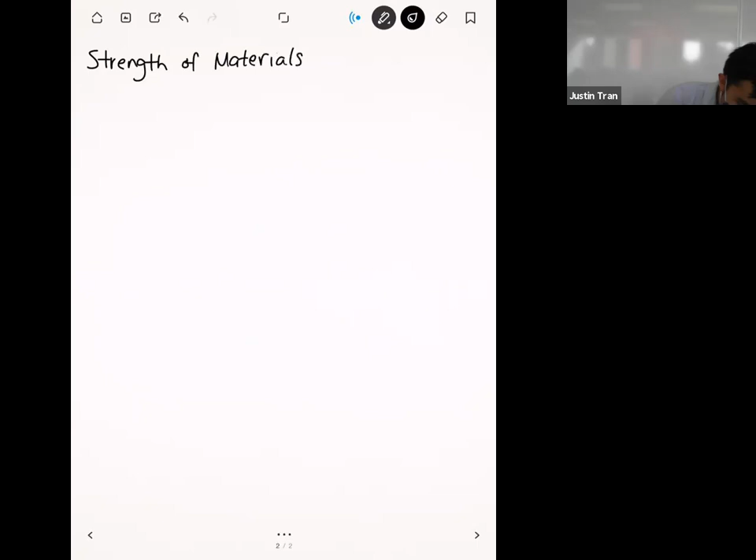Let's go ahead and finish up our review of strength of materials. Last time I think we left off talking about the concept of stress. There are really two main concepts I want you guys to take away from this review: stress and strain. Stress, as we talked about before, is basically the internal forces that develop within a structure, and these internal forces develop whenever a structure is exposed to any kind of external loads. Their primary purpose is to make sure that the structure maintains equilibrium at all parts of the structure.

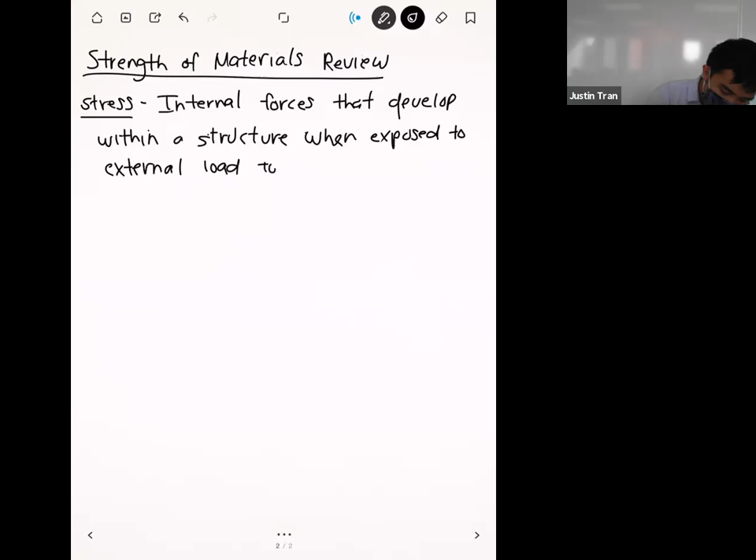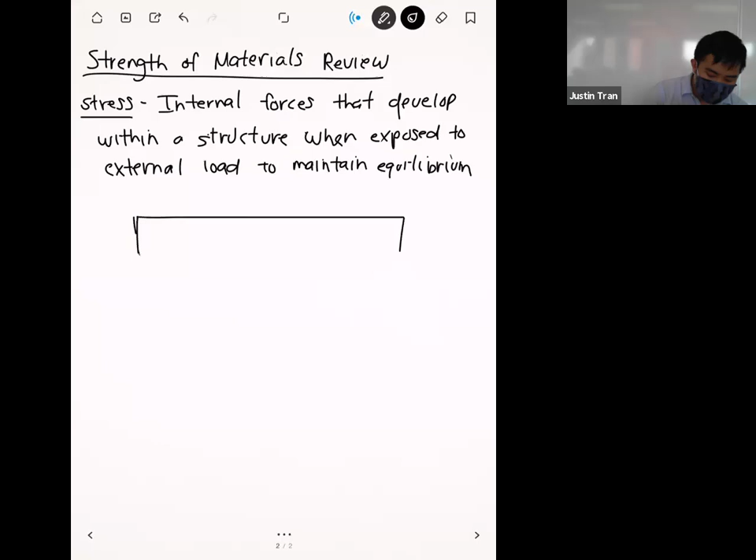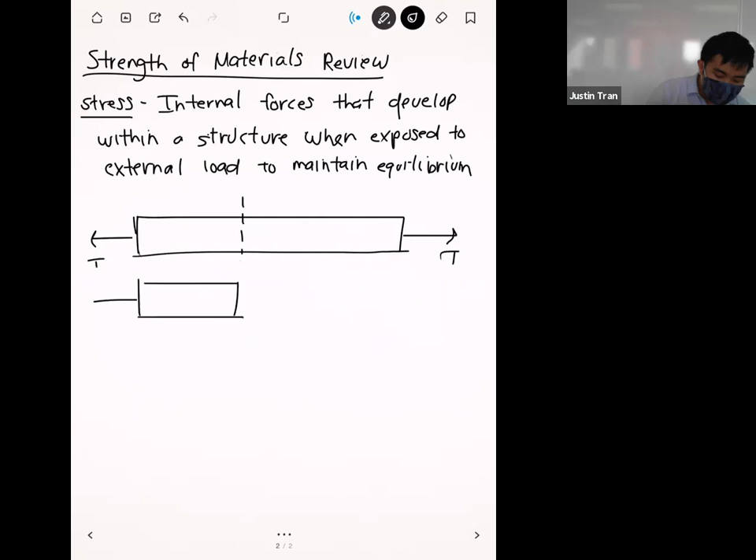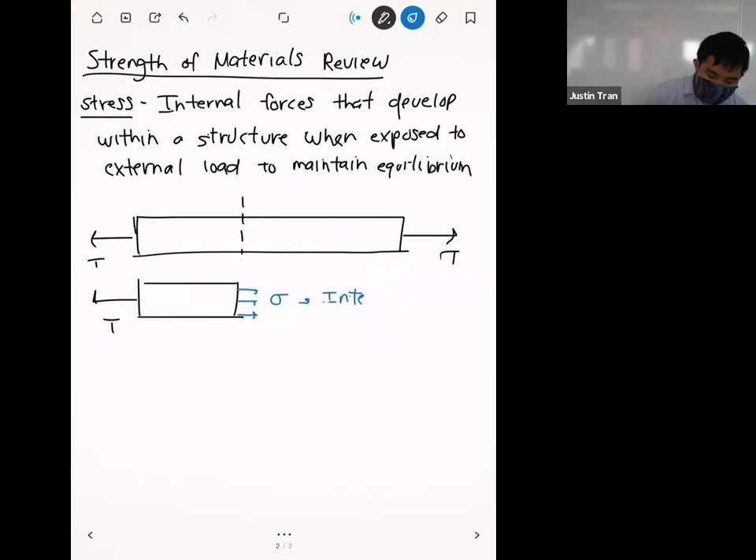The simple example we did last time was a rod. If we pull on this rod in tension on both sides, applying the same load T in opposite directions, we know this rod as a whole is in static equilibrium. But if you slice the rod on the interior, this section also has to be in static equilibrium. In order to maintain that, some internal stresses here have to develop.

So why do we care about this in biomechanics? Especially when we start to talk about bones—biomechanics, remember, is just an application of all these principles to biological systems. Where stress is relevant for biomechanics is that it helps us determine whether a bone, a ligament, or any kind of tissue will fail.

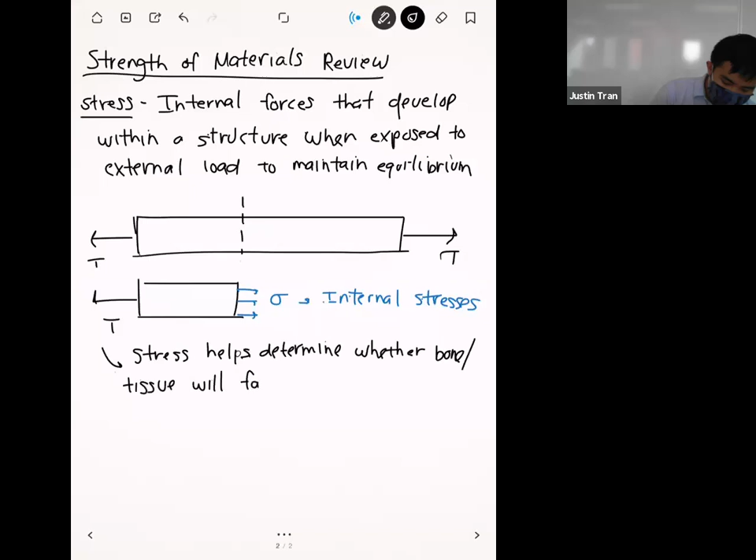Every material, and bone and tissue are no exception, has this parameter called the yield strength. The units for the yield strength are the exact same as stress. So if the internal stress within a structure ever exceeds the yield strength, then we know the structure is going to fail.

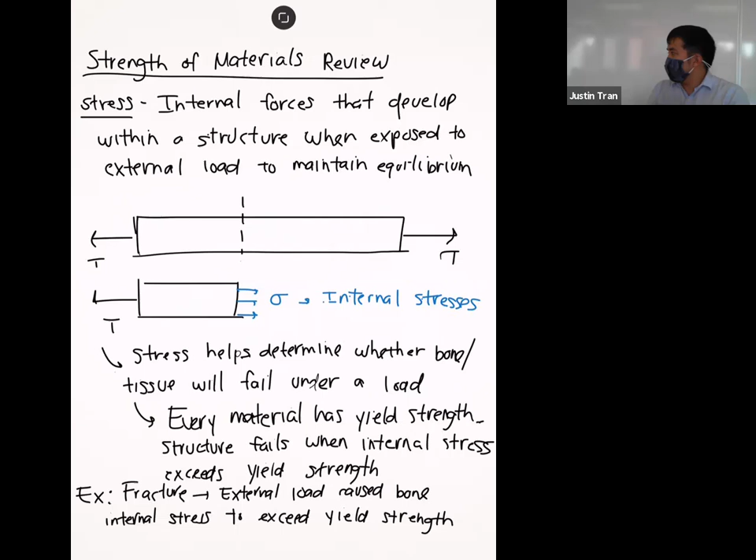As an example, or just a visual example here: when you get a broken bone or a fracture, what happened is that your body sustained some kind of large external load, and it sustained it in a way that the internal stress within the bone exceeded its yield strength. Bone is actually quite a bit more complicated than your typical engineering materials, but it still kind of behaves the same way—whenever you stress it past yielding, it's going to break.

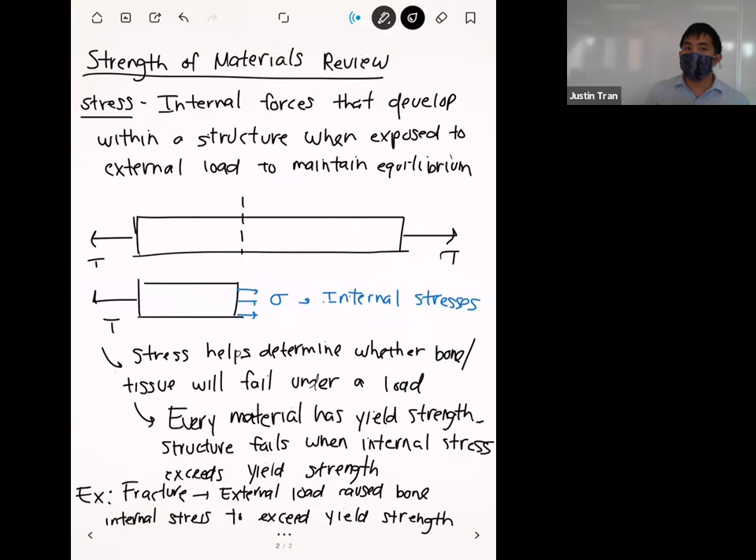Last time I know we started talking about the 6 components of the stress tensor, but I'm going to skip over that for now, because I thought a bit more about what I want you guys to take away from this. Talking about the stress tensor and all the different components gets a little too into the weeds for what we're going to do. So I want to leave our discussion of stress here, and then we'll take this and start to talk about some biological stuff. Any questions on this so far? Alright, so that's stress.

Now let's talk about strain. Strain is typically how we characterize deformations within an elastic structure.

In terms of units, strain has no units. Because the way strain is defined is that it's defined as a change in length divided by its original length. So it's basically a relative change in length.

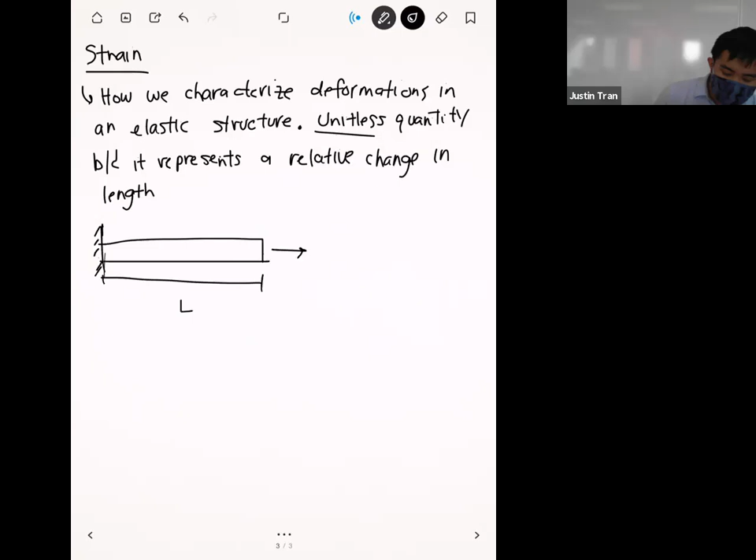I think the simplest example that we can have here is, let's say that we have some kind of rod. And so if we pull on the rod, let's say that our rod has some initial length L. And then after pulling on the rod it's going to extend. I'm making it very exaggerated here, so normally you won't see a rod extend this much unless it's made of cheese or something. So there's the original length, and that's the increase in length. And so usually we call an increase or decrease in length delta L.

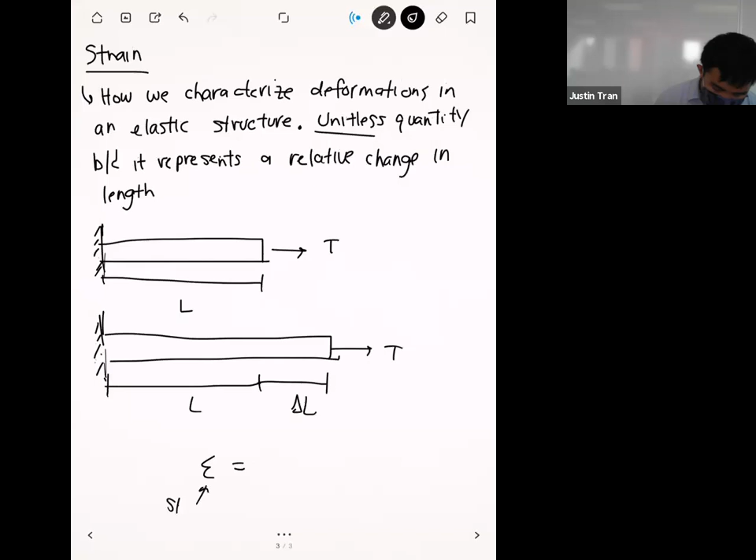And then from here, the strain, which is usually given the symbol epsilon, is given by delta L divided by L. And since we have a length divided by a length, this whole quantity here is unitless. Any questions on this? Probably you guys have seen strain before in your previous classes.

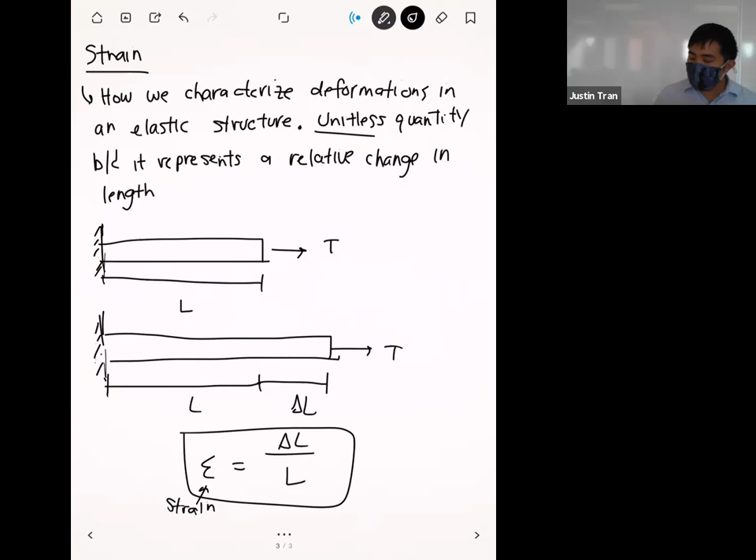All right, so that's strain. And so we have two key concepts in strength of materials here: stress and strain. It turns out that these two are very closely related. The exact nature of their relationship depends on the type of material that you're looking at.

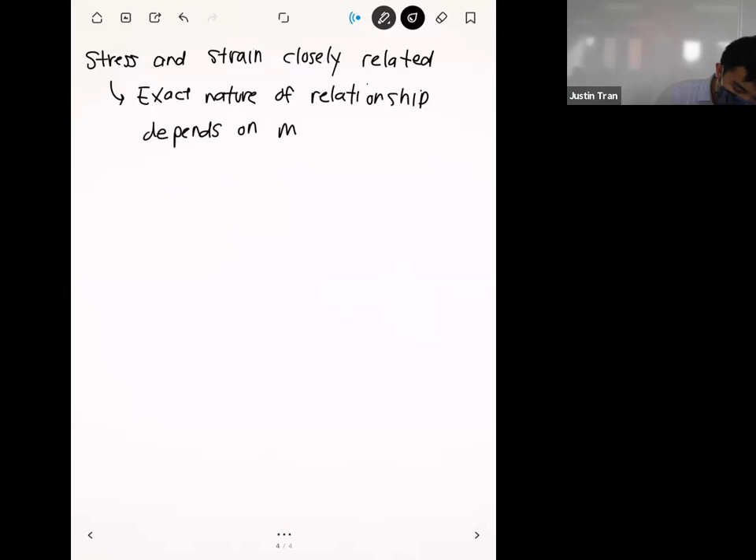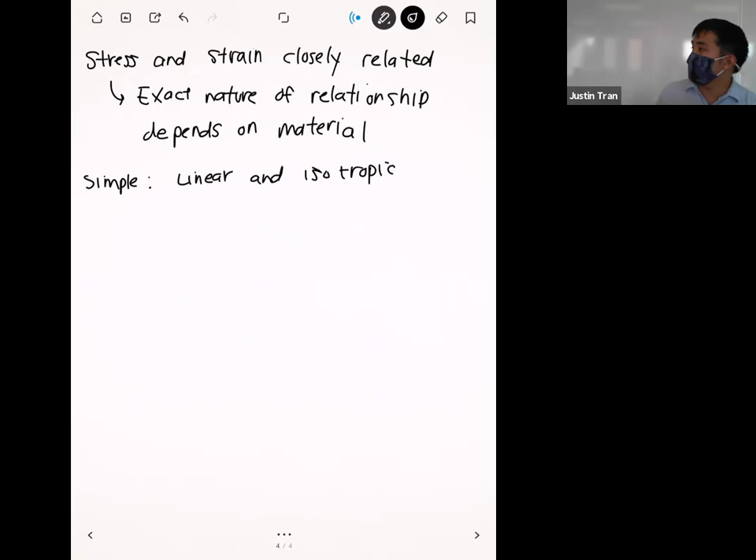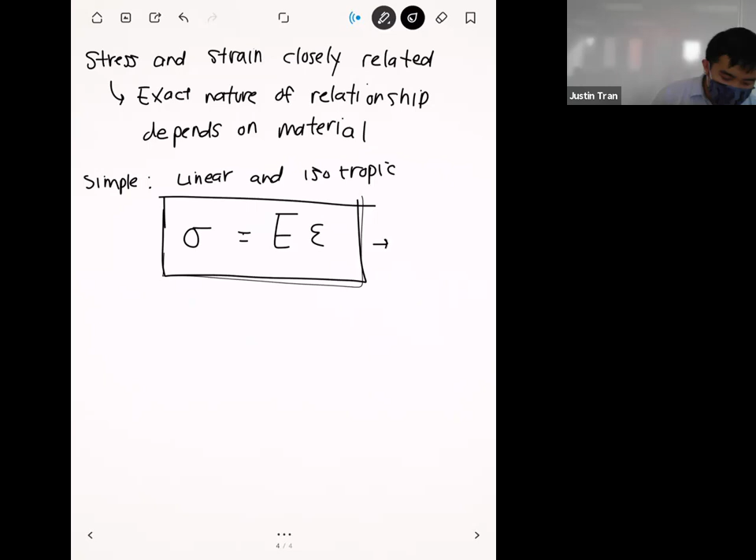But in the simplest case, we have what's called a linear material—I should say linear isotropic. In these materials, the stress and strain are linearly related. So we have stress is equal to some number multiplied by the strain. This particular relationship is known as Hooke's law, or a very simple case of Hooke's law.

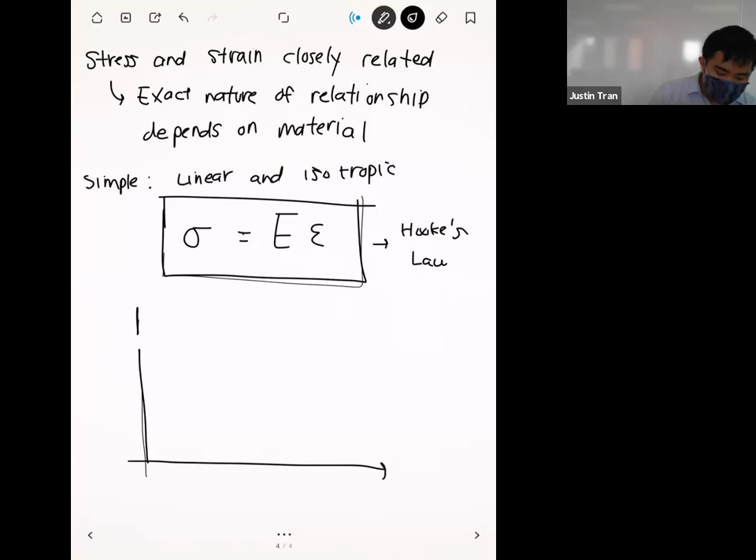And so for a linear material, we can draw up a stress-strain curve. If we have strain on the x-axis and stress on the y-axis, a linear material will just go straight up like that, where the slope of this line is E, where E here is the Young's modulus of the material.

All right, so that's stress and strain and how they're related. A linear material is usually the nicest one to work with because it's simple—once you know the strain, all you have to do is multiply it by the Young's modulus, and that will give you stress. The unfortunate thing is that we'll almost never see this relationship for any kind of biological materials, because biological materials are mostly composites of lots of different types of chemical constituents, so you'll very rarely see this kind of nice relationship.

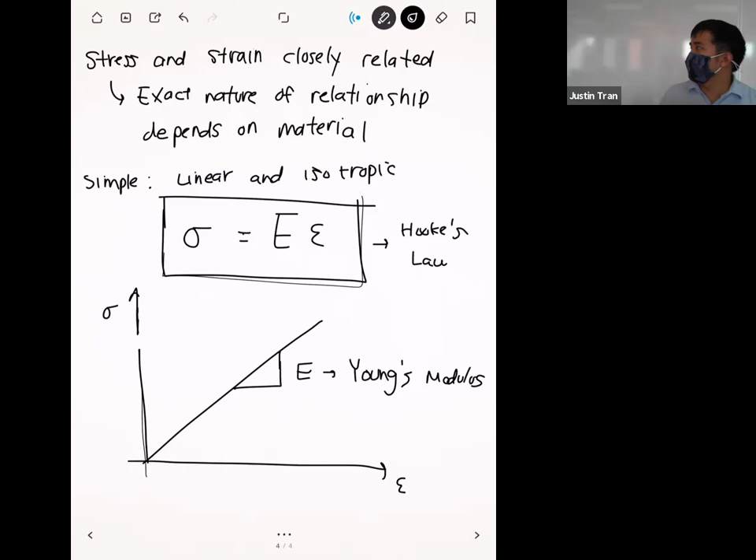Next we'll be going over bones. I'll show you probably later on today that bones actually follow a law where they're going to be either anisotropic or orthotropic. Those are kind of the two different ways stress and strain are related in bones, and we'll talk about what that looks like later on. Any questions on this before we move on to bone biomechanics?

All right, and so that's it for review. I had a lot of review planned for this class, but I realized that it's week 3 already and we're still doing review, so I should probably cut it short now. Finally, we're going to get into some kind of new exciting stuff, so let's start with bones.

And so the way I structured the next few weeks is that we're going to talk about the three main structural components within a human body. We're going to start with bones this week, and it's going to go into next week. After that, we're going to talk about muscles, and then after that, joints. We're going to talk about the general qualities of these kinds of tissues, and then after that, we're going to spend the next three or so weeks talking about specific body parts.

With the knowledge we'll have about bones, muscles, and joints, we'll see how that actually applies to your shoulder, arm, knee, or hip. Hopefully the next few weeks should be pretty exciting because it's fun new stuff. But we're going to start with the bone, because I think bones are the simplest of the tissues to look at within the body.

The first purpose they serve is that they provide a structural framework. This structural framework not only provides the support needed for the human to perform daily actions, but it also provides protection for a lot of the softer tissues in the body.

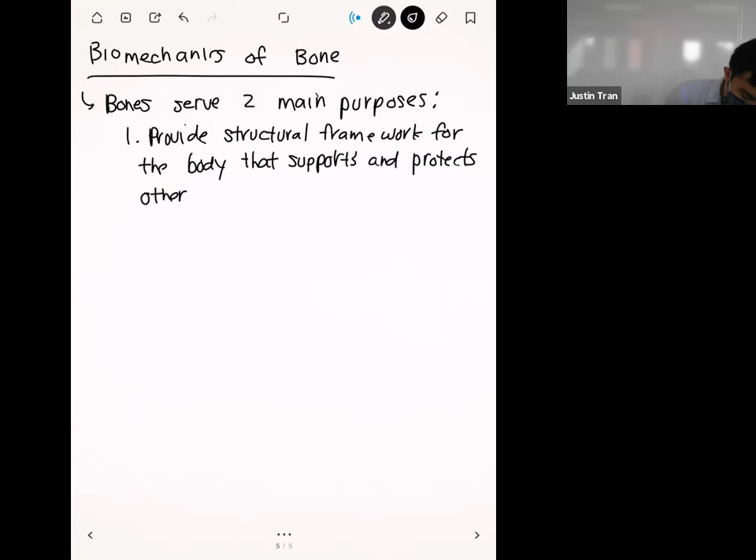So that's the first main purpose, and I think that's the one people generally think of when they think of bones. The other main purpose bones serve is that they form basically a bunch of rigid levers within your body, which is important because it provides a place for your muscles to attach to. Once your muscles attach to the bones, they can use them to move your body and do other stuff.

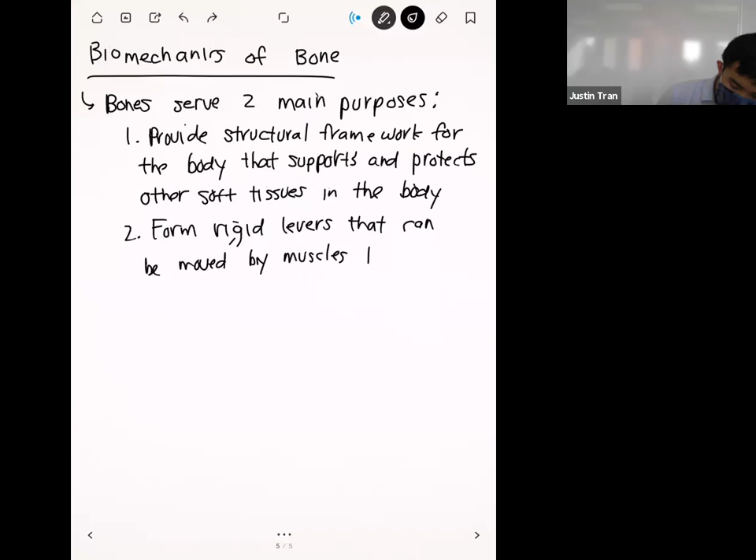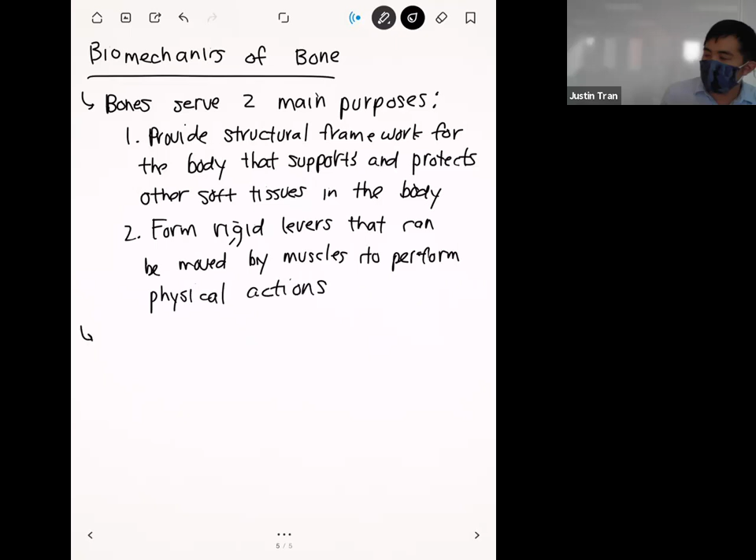So if you had to characterize what bones do for the human body, I'd say those are the two main ones. Based on this description, and based on our intuition, bones are often seen as these very hard, rigid structures within the body.

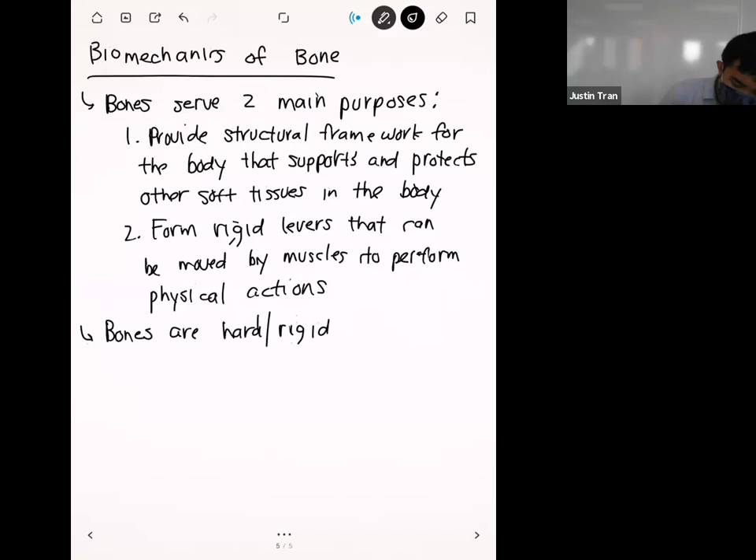They come in lots of different shapes and sizes, and each bone has its geometry morphed or designed for its specific purpose.

Just like any other system of your body, maintenance of your bone health is extremely important for every individual. This is especially important as you age.

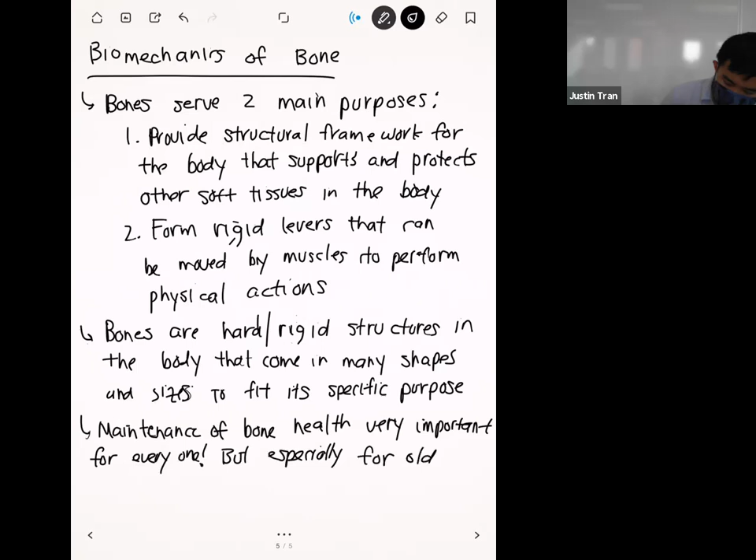As you age, the bones themselves lose a lot of their structural integrity. If you watch any daytime television, you've probably heard of the condition called osteoporosis. We'll be talking about that later, but basically it's a condition where your bones lose a lot of their calcium or mineral content and thus lose a lot of their strength, making you more susceptible to things like fractures.

If you have any injury to your bones, it's going to make movement or any kind of physical action a lot tougher—not only because of the pain, but also from a stability standpoint.

Because this is an engineering biomechanics class, we're not going to go into super great detail about all the bone structural data. My goal is to provide you with the functional information you need to design devices for bones, because there are a lot of medical devices and treatments out there that support bone health—either structural devices that offload some of the stress bones experience, or medical therapies engineers contribute to help bones heal from injury.

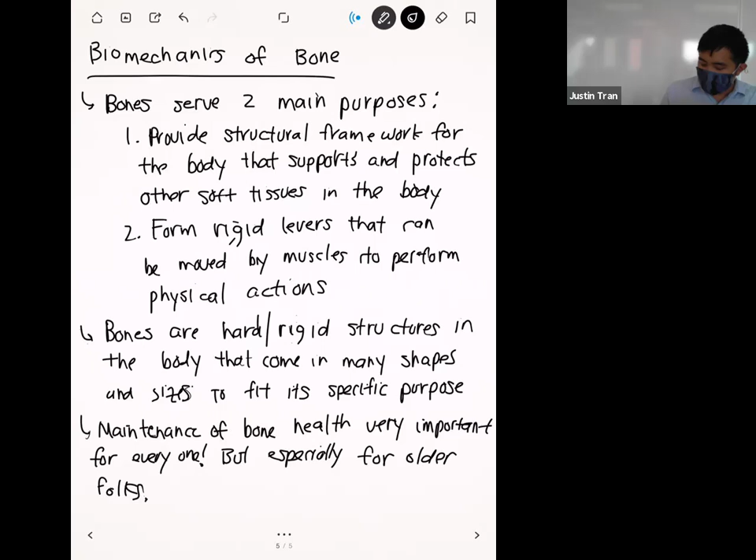Any other questions on this? Okay, all right, so let's talk about the composition and structure of bone tissue.

Before we talk about the chemical composition, let's talk again about what bones need to be in order to accomplish its goal. We know from the previous page that bones need to be strong.

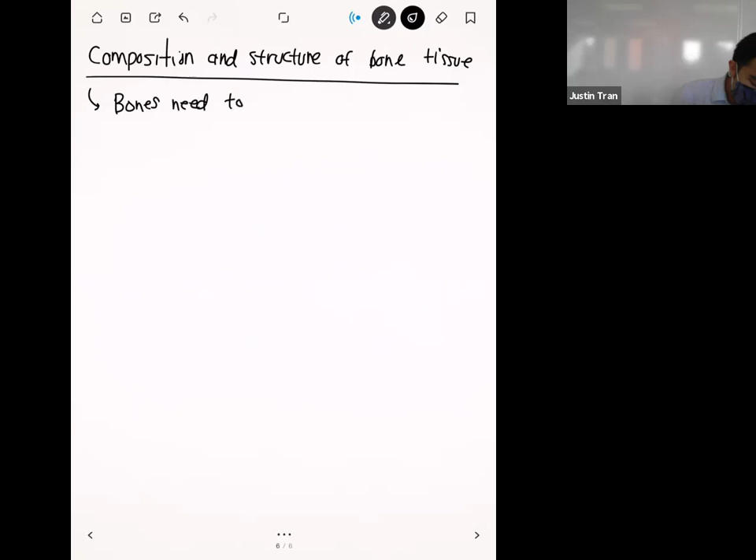We expect that bones are going to be carrying a lot of the weight or a lot of the loads for our body, so they need to be of some kind of material where we can have confidence that it's not going to break under any loads. But another important quality that bones need to have is that they also need to be pretty lightweight as well.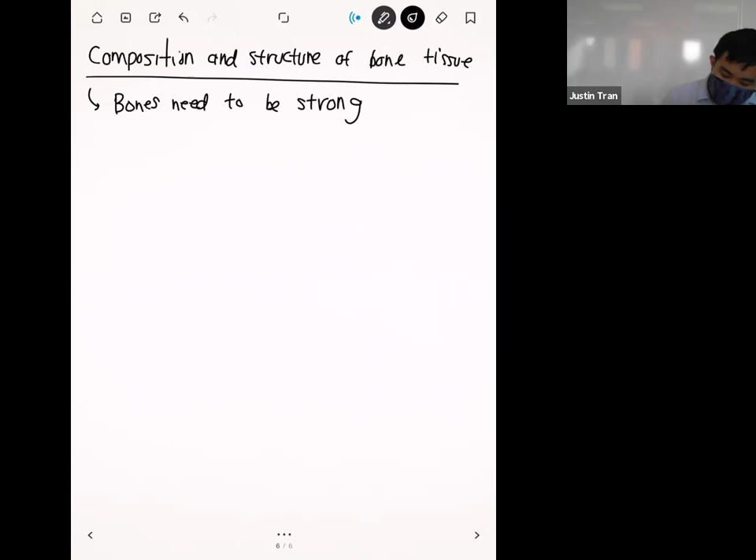Because remember, your bones are the main thing that your muscles attach to. So when you swing your arms or perform any kind of movement, it helps a lot if your bones are lightweight so that you don't feel that force. If your bones weighed any more than they do, it would take a lot more force from your muscles to lift your arms or walk. So the main things you're looking for in bones are that they're strong and lightweight.

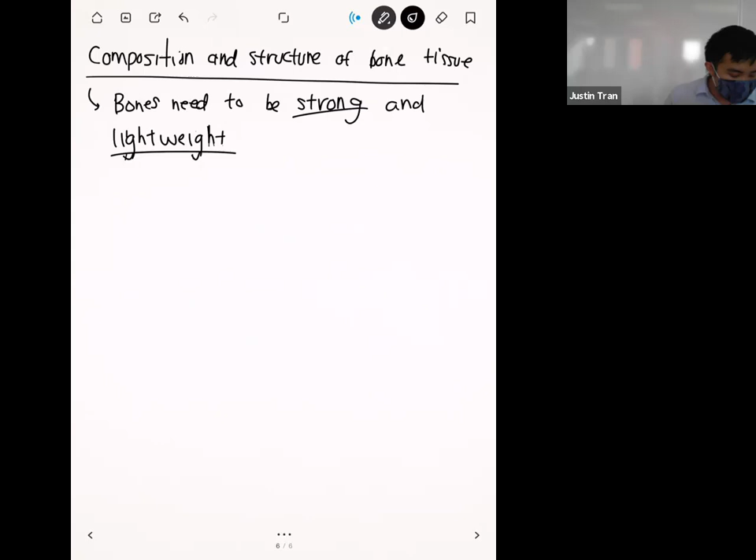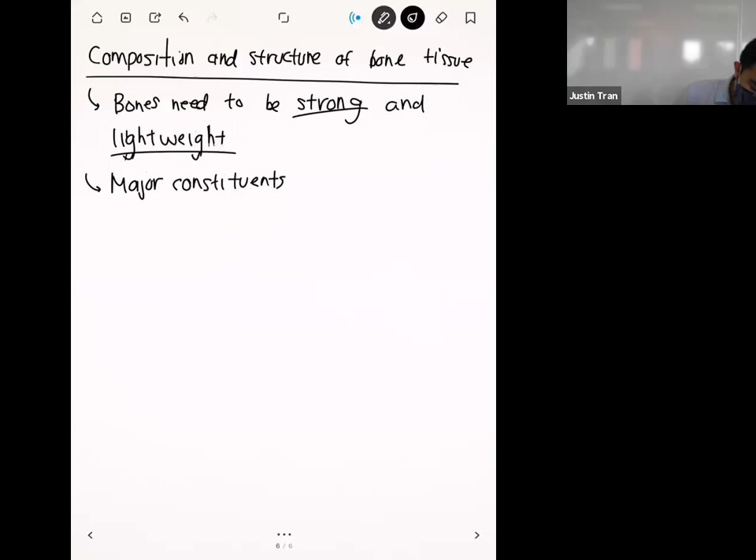The way the material constituents within bone are arranged helps to accomplish both of these goals. So let's talk about the major minerals and major materials that make up bone.

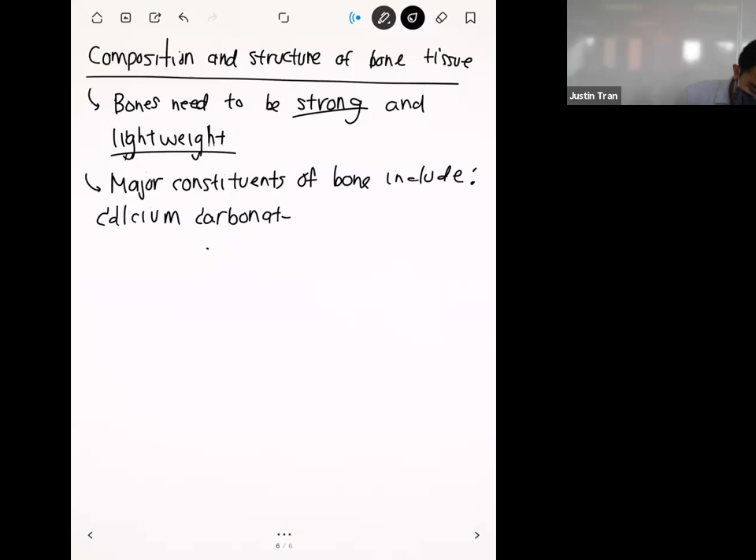The first major constituent is calcium carbonate. I think we've all seen the commercials, or maybe your parents told you growing up to drink a lot of milk, because milk contains a lot of calcium, and calcium is good for your bones. So that wasn't fake news—that's true. Another kind of molecule of calcium in your bones is called calcium phosphate.

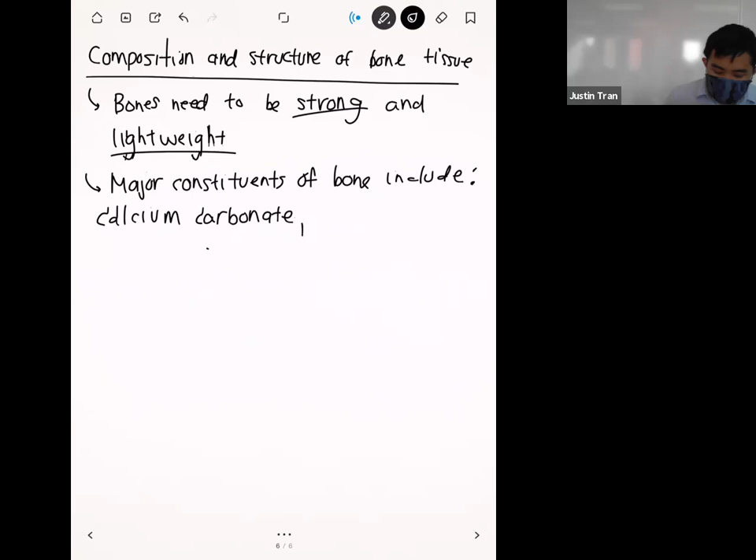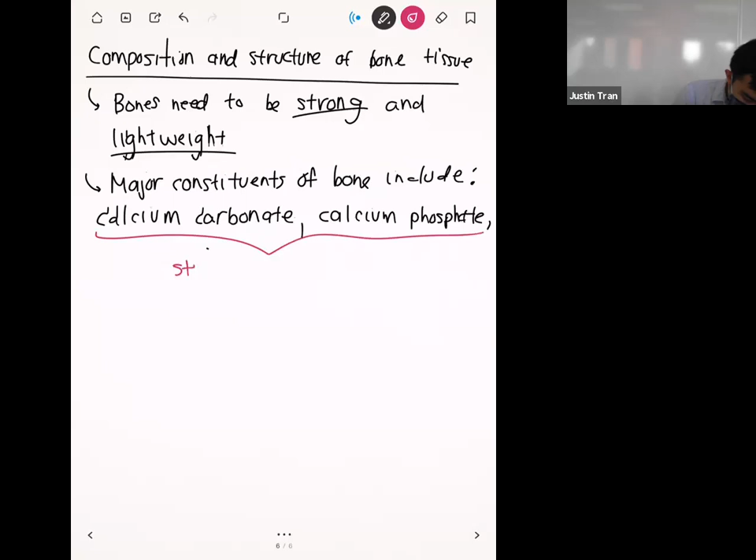Calcium is used in both of those compounds, and both of these calciums are known as the strengthening minerals for bones. These are the chemicals that basically give your bone strength.

Calcium is a mineral, and calcium gives your bone strength. So the more calcium that you intake, a lot of that can go to your bones to make them strong. All right, and the other two constituents in bones that are important to know are collagen and water.

If you've never heard the term collagen before, collagen is a type of chemical within your body that's used to make up a lot of the tissue in your body—it's in bone, in your muscles, and in a lot of your soft tissue, lining the edges of your lungs, your blood vessels, so it's a very abundant material in your body. What these typically do is provide your bones a little bit of flexibility.

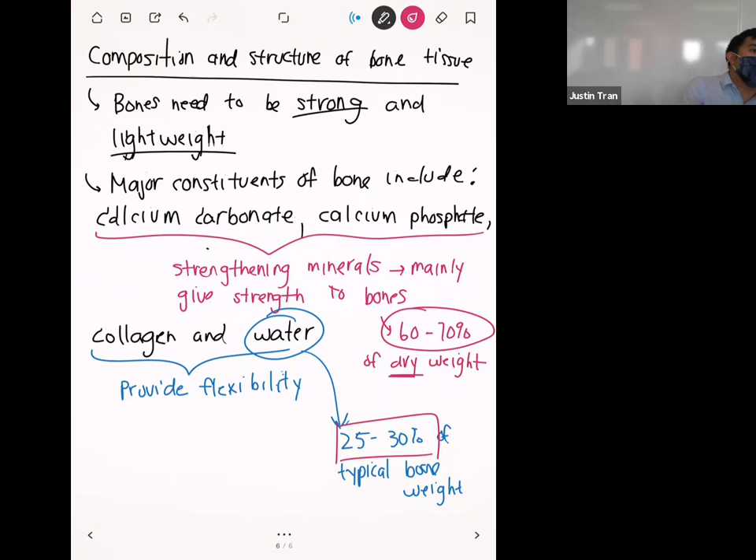So for example, if you were to turn a wrench too hard, like if the nut was stuck, could you actually fracture your arm? For an action you're controlling with your muscles, that usually doesn't put that much torsion on your bones, because a lot of the torsion is taken up by the muscles since you're actively using them to perform that action. Usually, if your arm's twisted in a way that's unnatural without you exerting your muscle to do that, that's when you're more at risk for a shear fracture.

Question? Oh, yep. Mm-hmm. All right. Any other questions on this? Okay.

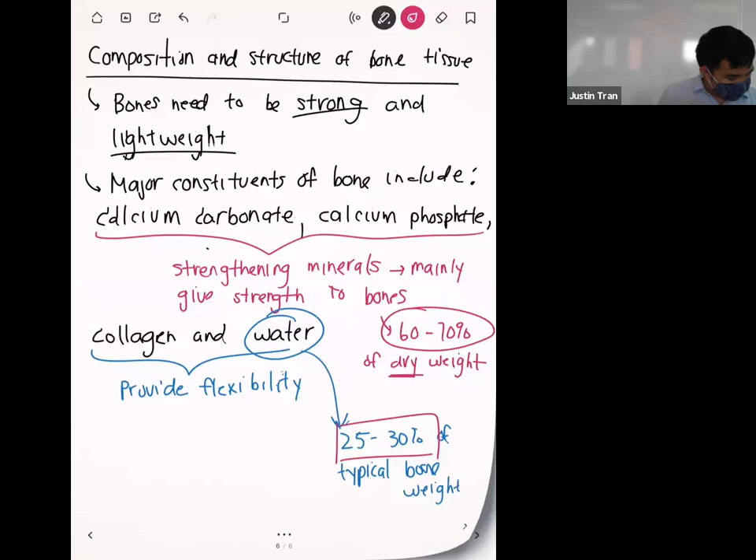Another important quality of bones I want to talk about is something called porosity. Have you guys heard the term porous before? You're probably aware of something that looks like Swiss cheese or maybe a sponge. Porous basically refers to how many little holes or air pockets are within the bone. Even though bone is made of calcium carbonate, water, and collagen, it has a lot of empty cavities.

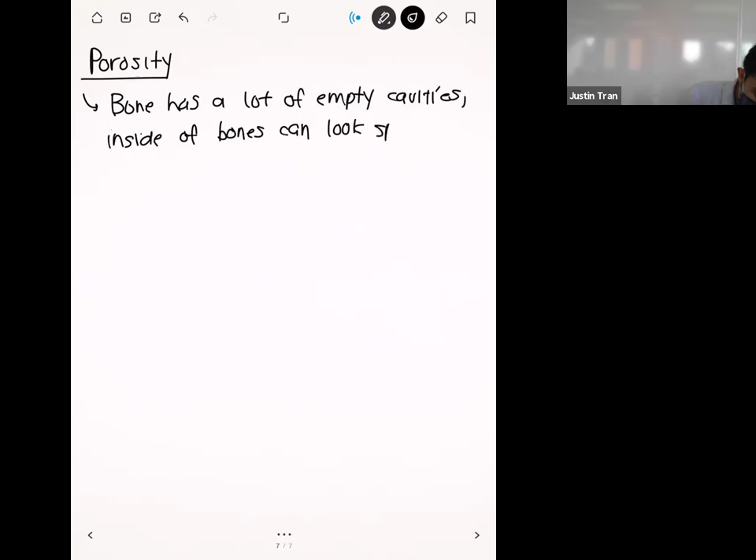The visual I think of—usually if you look up bones on the internet, it almost looks like a spongy kind of material.

The more porous a bone is, or the more porous a section of bone is, the more tiny holes it has and less space for the minerals or other materials.

From that, you can conclude that the more porous a bone is, the less strong it's going to be. The less percent volume there is of things like calcium carbonate or other minerals, the naturally weaker the bone will be.

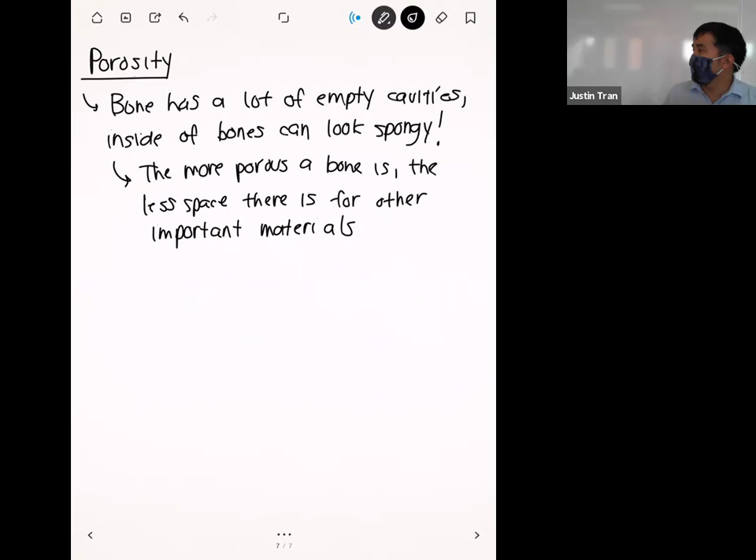Which doesn't seem great, right? Because we know bones have to be strong and rigid to perform their task. But actually having some flexibility and some porosity can be of benefit to certain bones, or more specifically to certain portions of bones.

A question in the chat: do these pores affect the strength? Like if there's a fracture, will it have a bigger crack propagation? Yeah, so generally, the more porous you are, the less strong you can expect it to be, and those types of bones will fracture a lot more easily.

In terms of crack propagation, I actually think more porous bones might dampen the crack propagation, because the more porous your bone is, it becomes more sponge-like. More spongy materials are less brittle. And if you're less brittle, you're less likely to crack, and you can handle harder impacts.

Bones actually use this to their advantage. Certain bones that have to be a little more flexible can do that by affecting their porosity. Let me talk about the two characterizations we have for porosity, and then we'll get into a bigger discussion of how these are used.

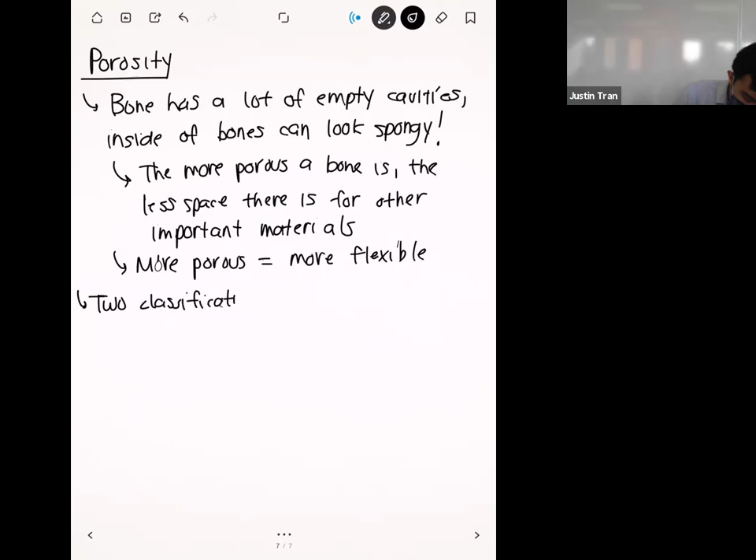The first classification is cortical bone. Cortical bones are bones with very low porosity, characterized by about 5 to 30% of their volume occupied by non-mineral tissue.

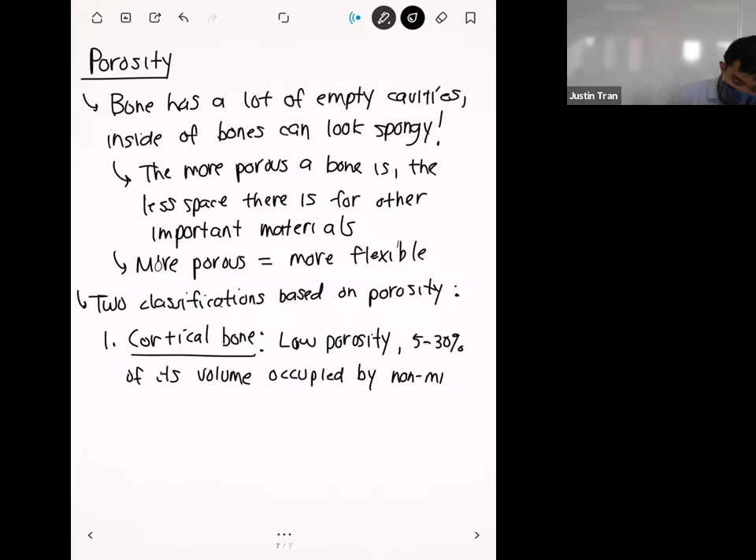Okay, so these bones will be predominantly made of calcium or those other minerals. And so due to its high mineral content, cortical bones tend to be much stronger and stiffer, compared to the next bone that we'll go over. This allows these types of bones to sustain very large amounts of load and not fail.

Okay, and so that's cortical bone. And so the next type of bone is known as trabecular bone. Trabecular bone is the opposite of cortical bones. These guys have high porosity, characterized by 30 to 90% of its volume occupied by non-mineral tissue.

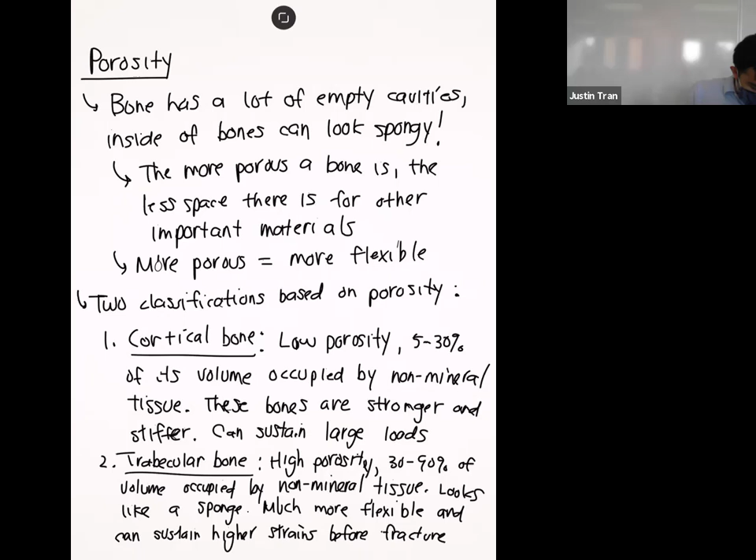And so trabecular bones, these are actually really great at either bones that are going to be sustaining a lot of impacts, or maybe even just at a section of bone that's going to be sustaining a lot of impacts. I'll show you a figure of this on the next page.

I'll draw one. But even for a typical long bone, say your upper arm bone or your thigh bone, what you'll see is that if you cut it open near the ends of the bone, you'll actually see much more trabecular bone than cortical bone, because that's where it meets other bones at the joint.

And so what can happen a lot is that these bones sustain a lot of impacts, especially if you're doing pretty high intensity physical activity. It helps for the ends of the bones to be more trabecular, because when you're sustaining all these impacts, you're getting a lot of micro strains and micro impacts. This helps prevent the ends of your bones from fracturing, because those are going to be impacted and compacted a lot more than the cortical bone. So at the ends you'll see trabecular bone, but in the middle you'll see a lot more cortical bone, because that's where it gets all of its strength.

Any questions on this?

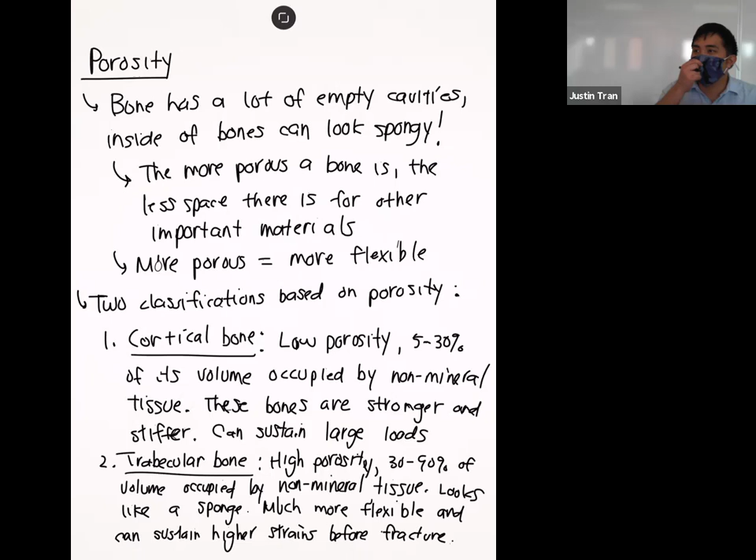Yeah, that's a good question. So it's not something that you can actively control yourself, but you can influence it externally depending on how much physical activity you do. And naturally what tends to happen as people age is that a lot more of your bones become more trabecular, just because you naturally lose mineral over time. So it's not something you can really control, but it does change over time based on some factors.

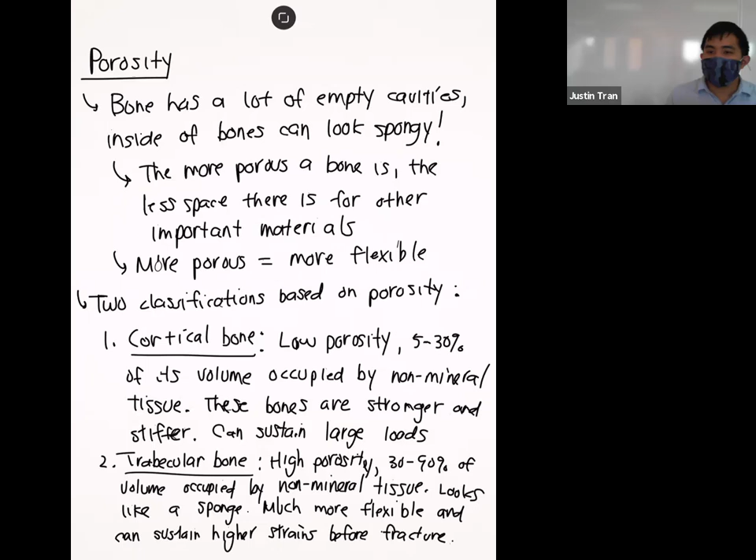Okay, so let me draw you an example of a long bone, and I'll show you how trabecular bone and cortical bone is typically distributed. A long bone is the bone that people usually think of when they think of a bone in general. These are the bones that make up your limbs, so your arm bones and leg bones, they all have this structure where it's a long cylindrical shaft. Like I talked about on the previous page, the ends of the bones here are where it's going to contact other bones.

Okay, and so as you go about your day and perform physical activities, the ends of the bones are going to be contacting other ones, and so it's going to be sustaining relatively high force impacts, depending on what you're doing. So it actually helps a lot to have pockets of trabecular bone in these sections.

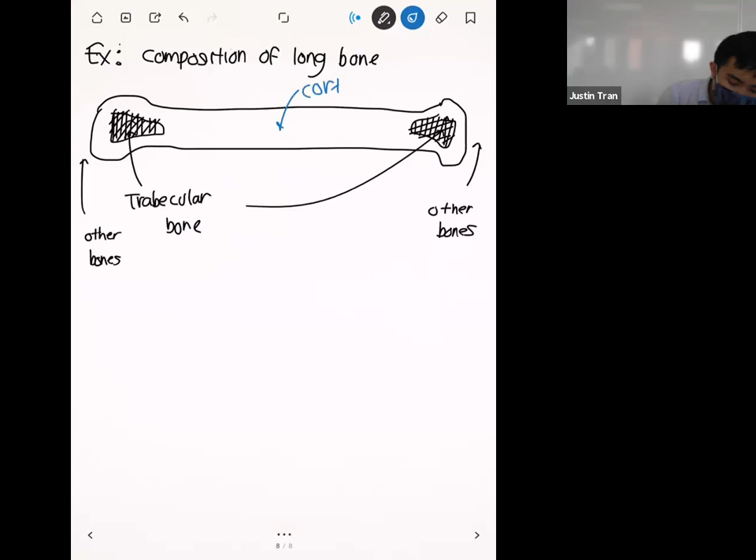Whereas the middle of the bone, which doesn't have to worry about impacts since it's not contacting anything else, is mostly made of cortical bone, because that's where the bone gets a lot of its strength. The ends of the bones have to sustain short-term impacts as they contact other bones, but for long-term weight bearing and strength, the middle of the bone is made of cortical bone to sustain these long-term stresses. So that's a typical long bone.

But of course, there are other bones in your body that have different shapes and different functions. So if you think of a spinal bone, or a bone in your vertebrae.

Your vertebrae is constantly absorbing shocks, and you have a lot of spinal bones in your vertebrae. So it's contacting other bones quite a lot, and it's subjected to a lot of high impacts - even just walking puts a lot of stress on your spine. So what you'll see from your vertebrae bones is that they're actually mostly dominated by trabecular bone.

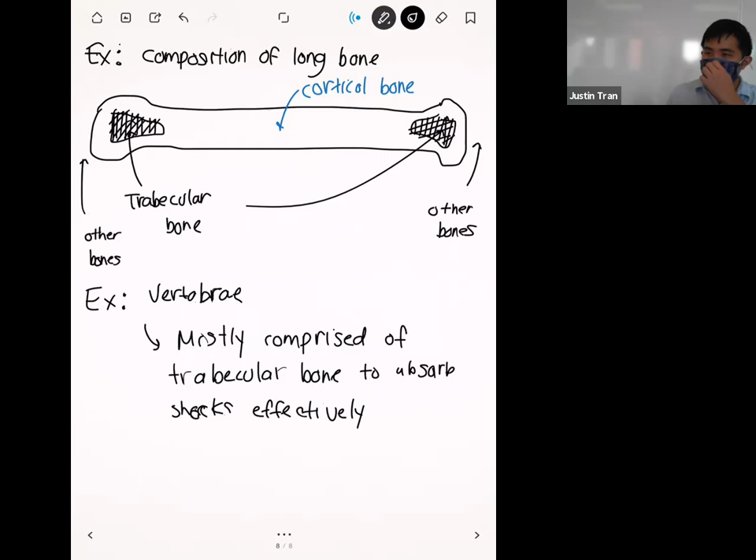Now let's get into the elastic properties of bone. This is the sequel to the very beginning of class where we talked about stress and strain. At the beginning of class, I showed you this relationship here.

Stress and strain are linearly related, and this is for a linear isotropic material. But as I mentioned before, bones are not isotropic - you can consider them linear, but they're not isotropic. Bones are what is called an anisotropic material.

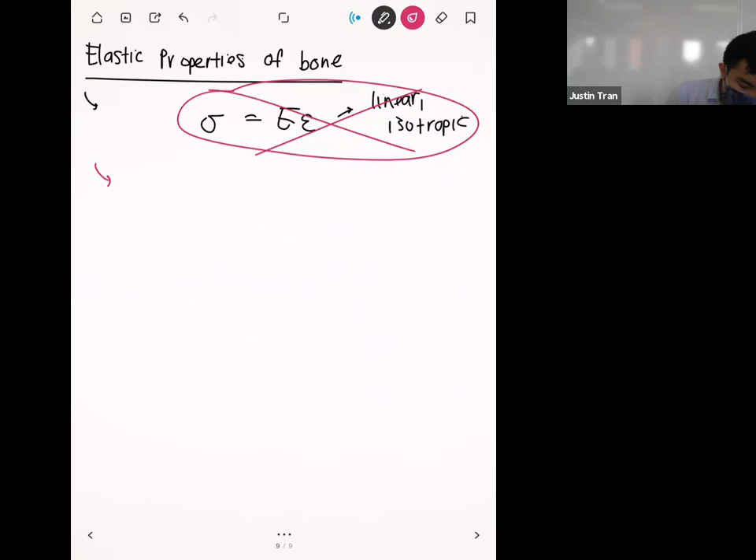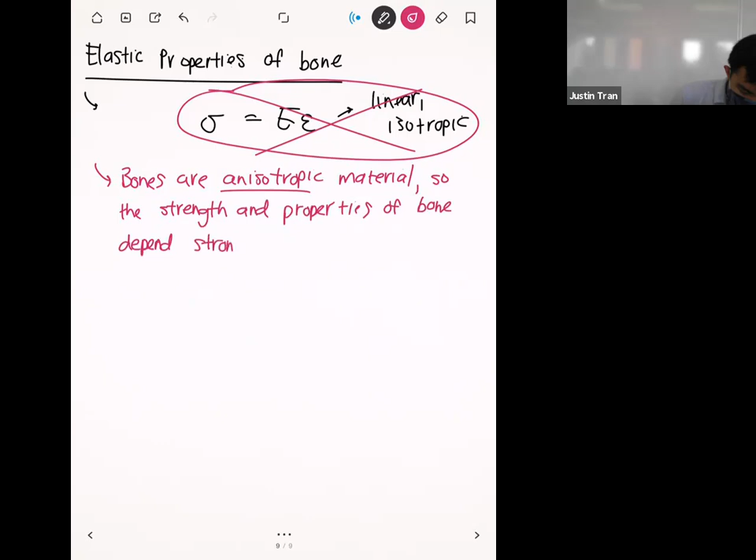Basically, what this means is that the strength and material properties of bone depend on which direction the load is applied. We talked briefly about this at the beginning of lecture today - bones have to be much stronger in compression and tension than they are in shear. And even more specifically, bones have to be much stronger in compression than anything else.

This complicates our description of the material, because up to this point, when we talk about material properties, we usually only worry about a few different parameters.

In the simplest case, where you have a linear isotropic material, the only properties you need are things like the Young's modulus, the Poisson's ratio, and the density. That's three properties, which is relatively few.

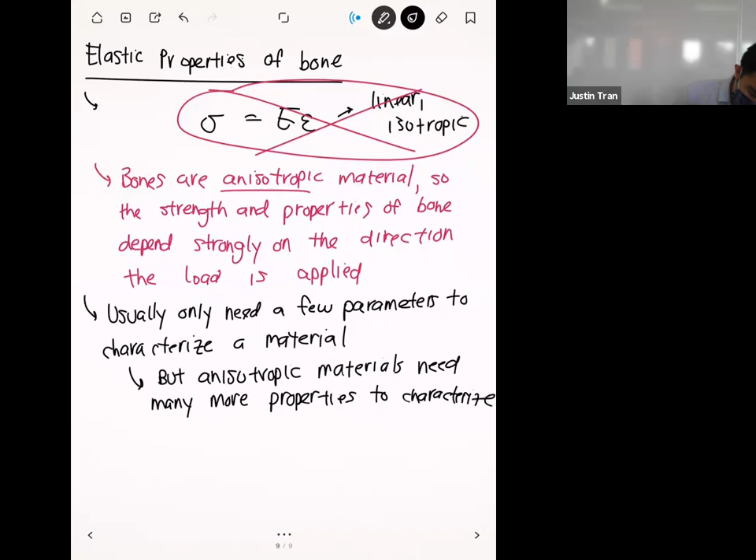But for an anisotropic material, you need a lot more material properties that tell you the strength in all the different directions.

So the question is, how many more material properties do we need? Well, it depends on the material. In the worst case, you can have up to 36 different material properties - that's the absolute worst case. But thankfully, very few materials actually fit into that category. Usually for most anisotropic materials, you're probably in the ballpark of 9, 10, 11, 12 different material properties, which is still a lot - more than 3, but more manageable than 36.

The main reason we characterize bone this way is that bones have to be much stronger in compression than all the other directions.

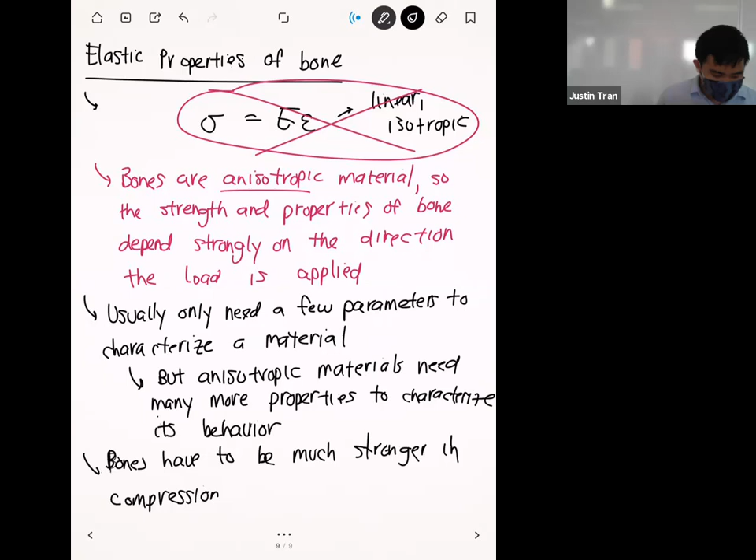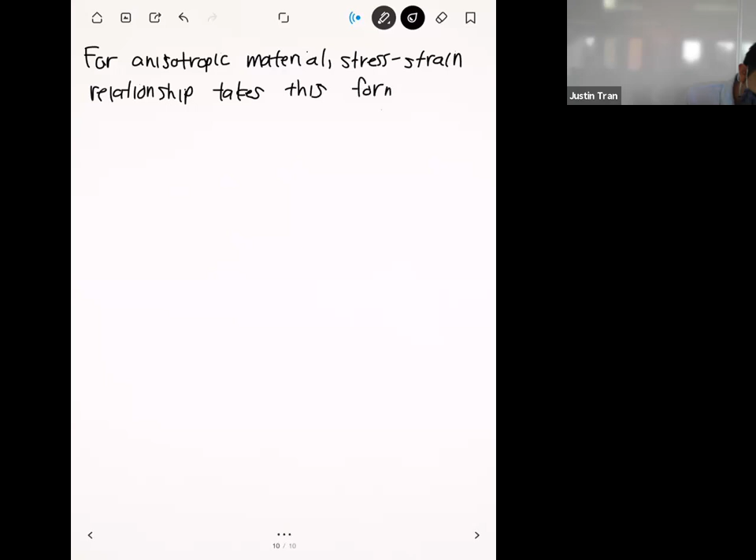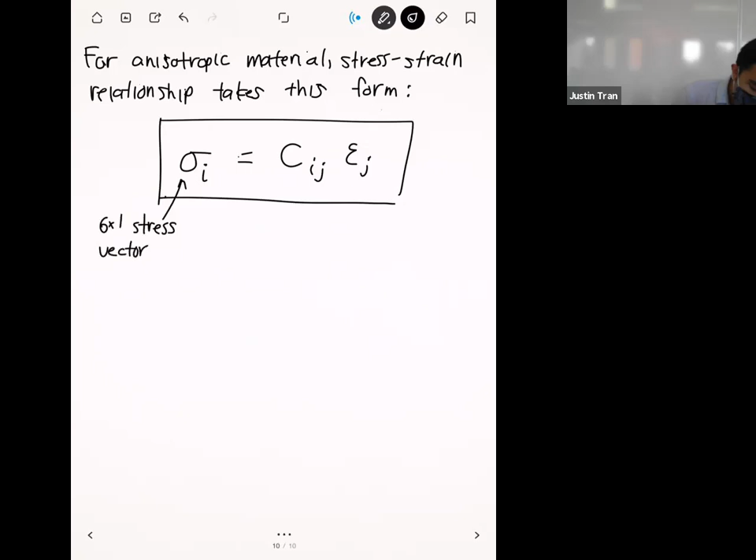I'm drawing the very shorthand notation here, where this sigma I is a 6x1 stress vector, and this epsilon j is the 6x1 strain vector.

This notation might not be something you've seen in a previous class, because when you think of stress and strain, you think of its tensor representation - normally a 3x3 matrix. This takes the 6 components of stress and puts them in a line as a vector. It's not very standard, not the standard way to represent stress, but it makes this representation a lot easier than it could be.

If you're curious what this sigma I looks like, it looks something like this - you'll have all the normal stresses up top, and then all the shear stresses on the bottom. But this is not so important for this class because we're not going to dive into the nitty-gritty of all the different stress components.

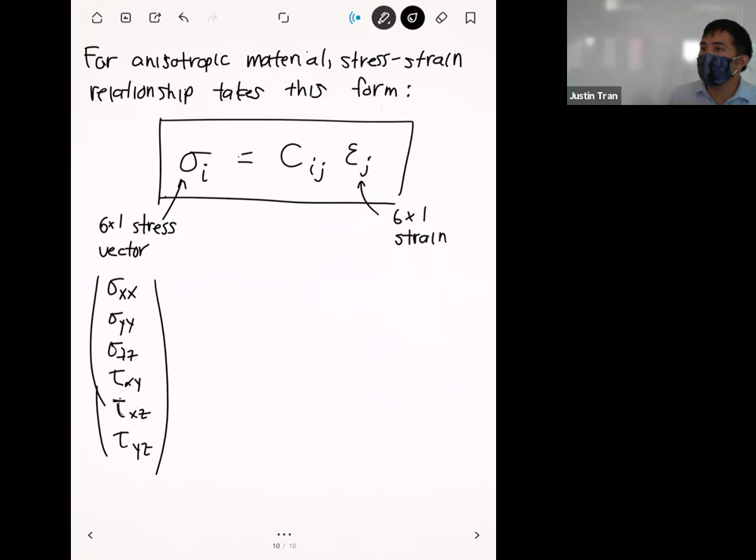If you remember from last week, normally we arrange these stress components into a 3x3 matrix, but here they just stack them up together as a vector.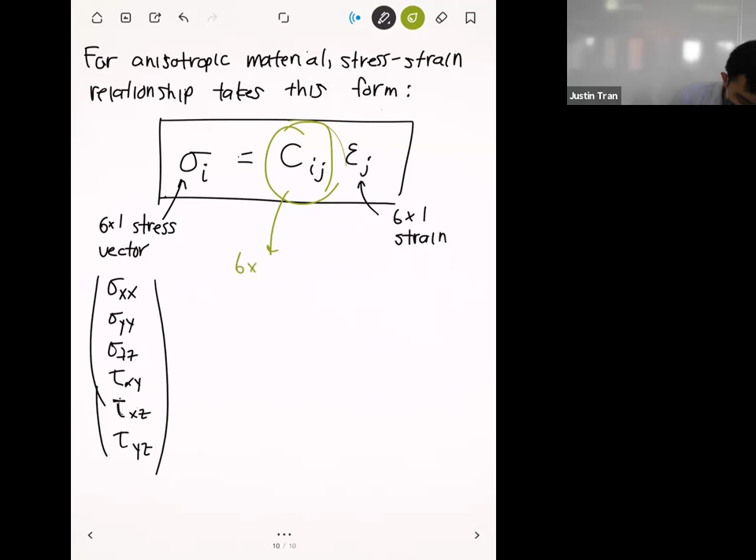The key quantity here is this guy right here - this is a 6x6 matrix of elastic constants.

Okay, so this is the guy that's replacing our Young's modulus from the previous page. Instead of having just a scalar number, just one number that represents this, now we have this 6x6 matrix that basically represents every possible combination of stress and strain that there is out there. Because the thing with anisotropic materials is that different components of the strain can affect different components of the stress. For a linear isotropic material, the only strain that's going to affect a certain component of the stress is when those two match. But for an anisotropic material like this, any component of the strain can affect any component of the stress, and the way they're related is through this matrix.

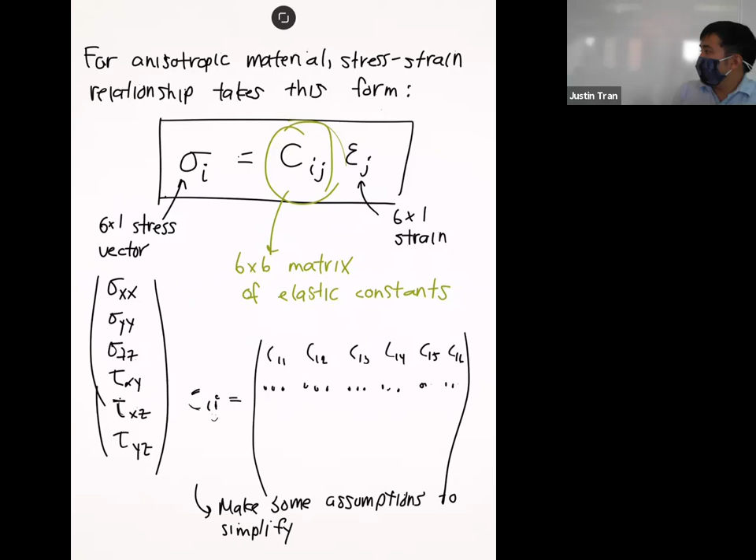Like I mentioned earlier, there's 36 different constants in here, so you can have 36 different material properties for a most general anisotropic material. That's tough, and that's normally way too much to account for on its own. So usually when you have a material that's not isotropic, you can make some assumptions to simplify this matrix. The nature of these assumptions is that they're basically symmetry assumptions. Even though everything's not isotropic, there's still some symmetry in your material that you can take advantage of to simplify this matrix.

And that's going to simplify things quite a bit. On the next page, I'll give you the two most common assumptions that people use for characterizing bones, and how that simplifies this matrix. Any questions on this so far?

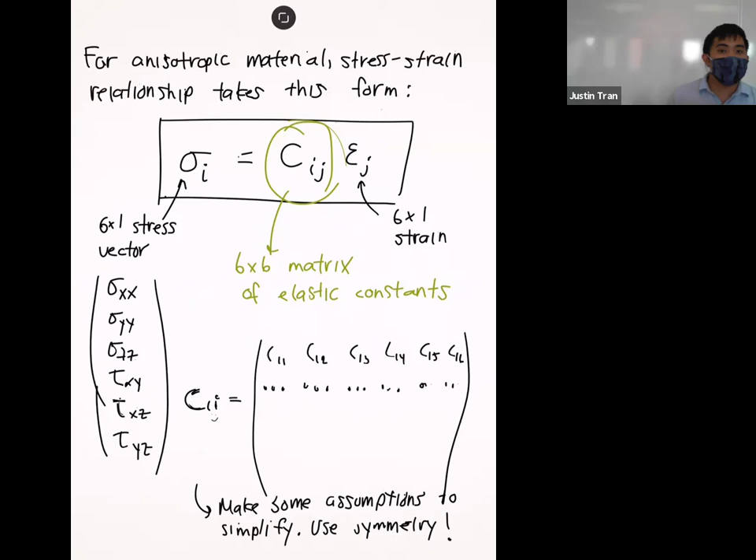All right, so the first symmetry assumption that we'll make is we'll assume that the material is what's called transversely isotropic. What that means is that the material properties are not going to change when you move around the long axis of the bone.

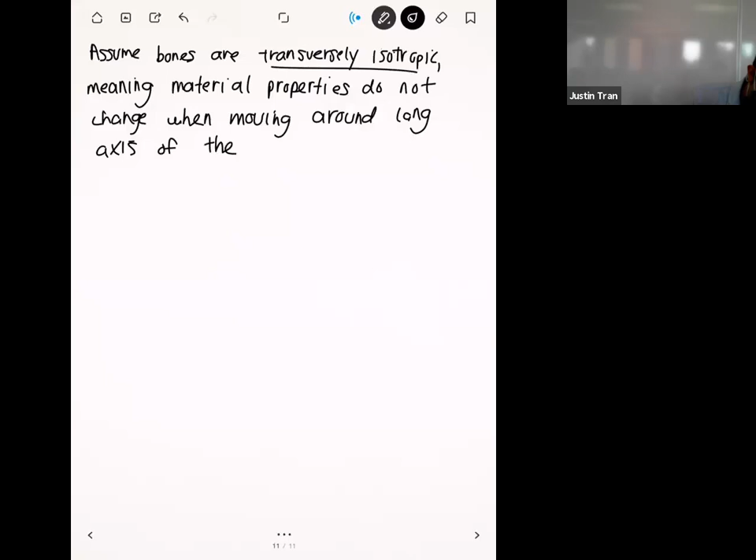If you draw a typical long bone like this, it's approximately cylindrical in shape. If you travel around the bone in this direction, basically walking around the outside of the bone in a circle, you're not going to see any change in material properties. That's basically all that it means. And if you do that, then the matrix of elastic constants simplifies pretty significantly. A lot of them turn to zeros, and in fact a lot of other quantities are mirrored to each other.

So if you apply this assumption, then your matrix of constants looks like you have C11 up top, C12, C13. But the rest of the first row are all zeros.

Right, so the second row will be C12. And by making this assumption, you're basically saying that C22 is the same as C11, so those two are going to be the same. You're also going to say that this third entry is going to be the same as what's above it, so that's C13. And the rest of it's going to be zeros as well.

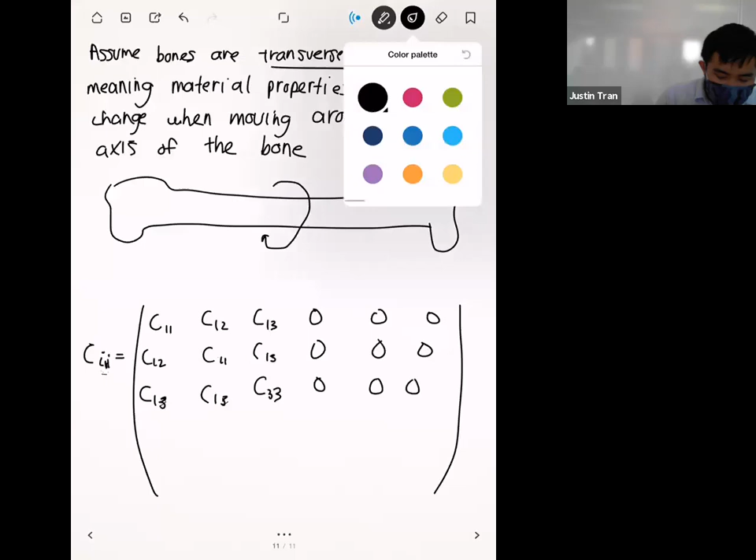So all of these guys right here should be C13. And then these two should be the same, so these will both be C12. And then these ones are C11 and C11. So all of these should be the same, just based on the symmetry arguments you're making.

And then the rest of the matrix looks like the following.

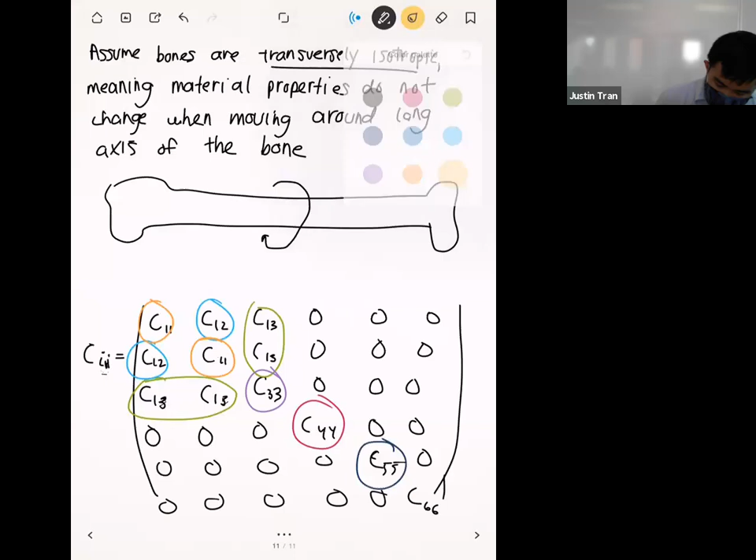So if we count the number of unique entries we have here, I'm going to try to use a different color for each one. If we count all the different colors, what we have here is 1, 2, 3, 4, 5, 6, 7.

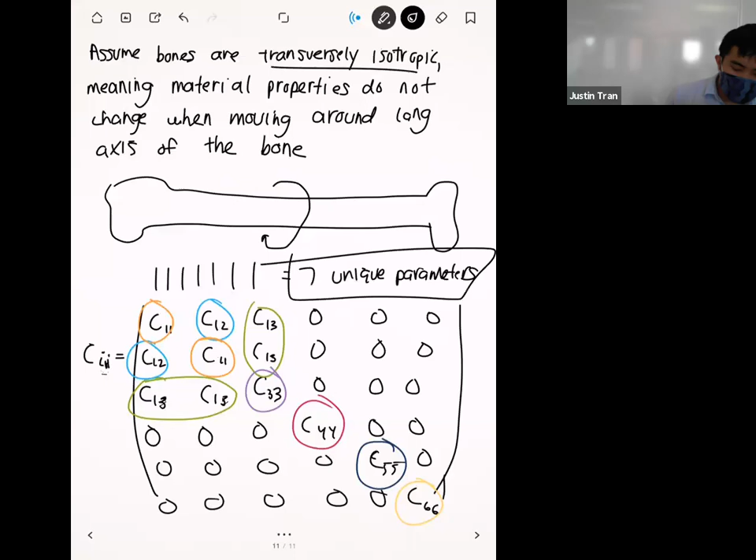And this is a lot less than the 36 we had before. So this is a pretty powerful assumption you can make, and it simplifies your characterization of the material really significantly.